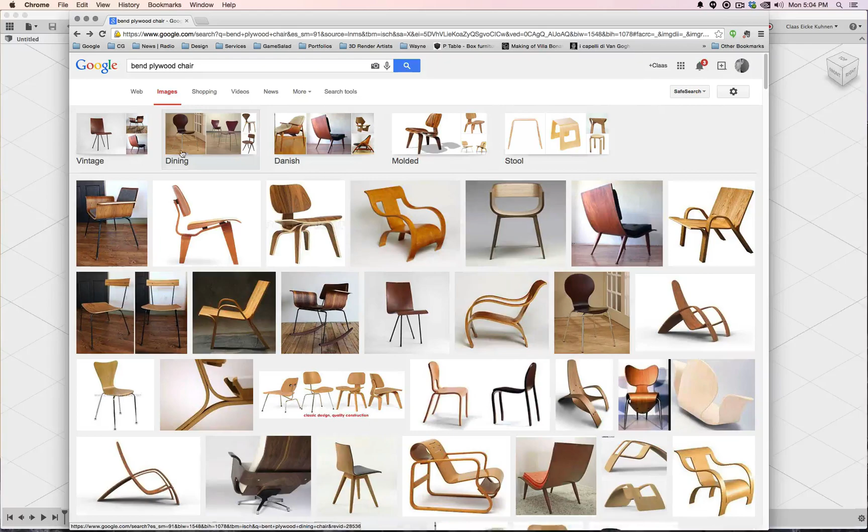And it really helps when you're not very familiar with shapes or designs to just use Google and browse around, get a sensibility for what styles are out there, what shapes are out there. You see they can range from very classic, kind of boring, to more modern or interesting, linear, more masculine, or more experimental and interesting looking, or also quite nice.

So the way I'm going to work with you, I don't want to say it's the only way we have to do it. In general, everything I do is just subject to change. There's no wrong, there's only more work and less work approach. So I will try to do something that's rather manageable.

So for example, if we would like to build something similar out of wood, we have to basically create a bent plywood master, and then we just cut parts out. So the same way we're also going to build it in CAD.

So I put down some basic measurements, and let's say this maybe is 18 inches by 18 inches wide. So I just keep those numbers the same.

So how do we start? Well, let's go to Fusion. I go to the sketch and let's change this to inches. I'm going to create a sketch, and I zoom out a little bit because I see where maybe 18 might be, and I click and drag a line up 18 inches, for example. Let's say there, click, press escape, and I'm simply using this line as a reference because right now I know where 18 inches height would be.

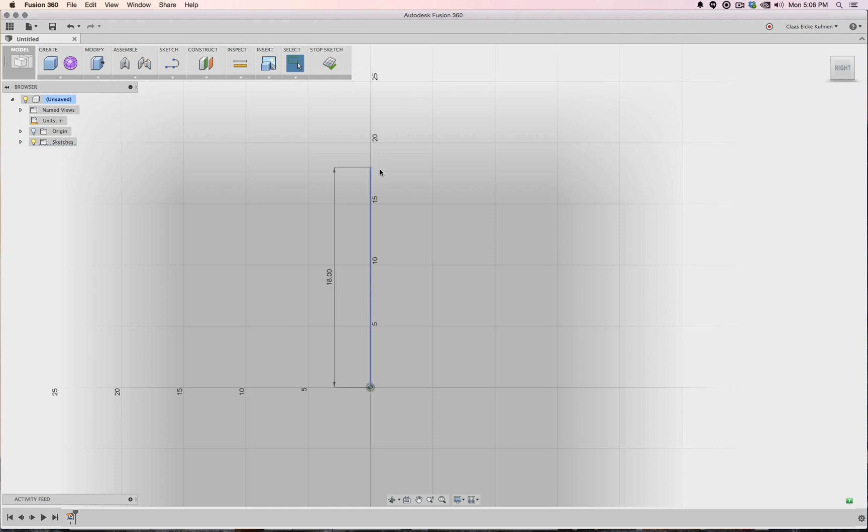So what we're going to do first is, with this line created, you see I can snap to the end. Let's say I type in 19 inches, hit enter, see it snaps horizontally, click, press escape. Good. Now this line I can delete, I don't need that anymore.

And then maybe from here, 19 inches, enter. So you see now I can only define the degree. Let's say that's the outside. Now we're drawing the inside, maybe something like this.

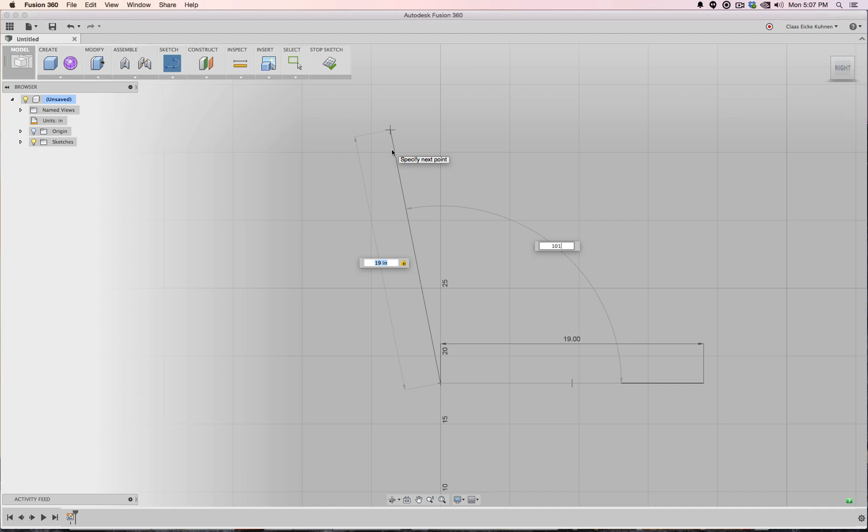So 101, okay. Also it's good to simply write down maybe those degrees at one point, so you just have a copy on paper, press escape. But you also see inside here the software actually gives us all the dimensions and the degree, so that's good.

Then this part down here, for example, should be rounded. Now because we're dealing with a bent plywood shell in this case, I will have to round the sketch.

But before I do that, I'm going to click stop. The main reason is I now have some sort of an old reference, and for example, I call this one reference, and I'm going to get back to edit.

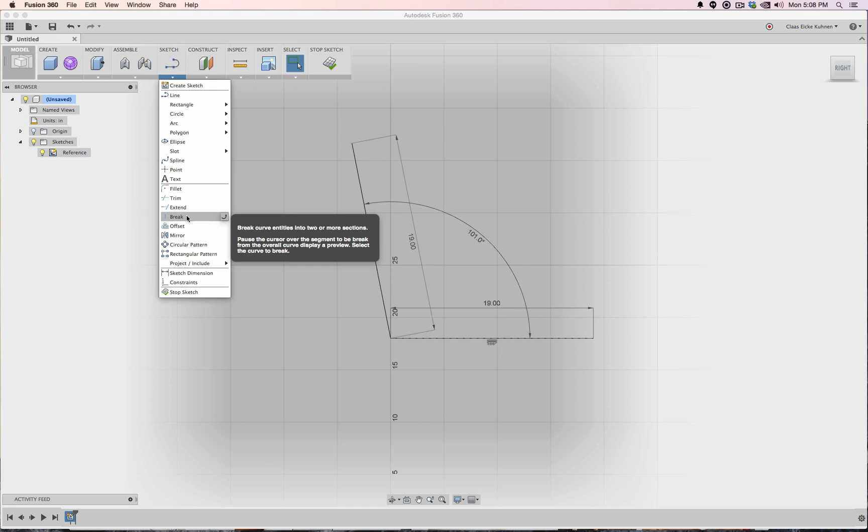And for example, I'm going to add an offset to this one, 1 inch. And you see there's a problem also, one line only gets offset. I'm going to show you what the problem is. So this doesn't work.

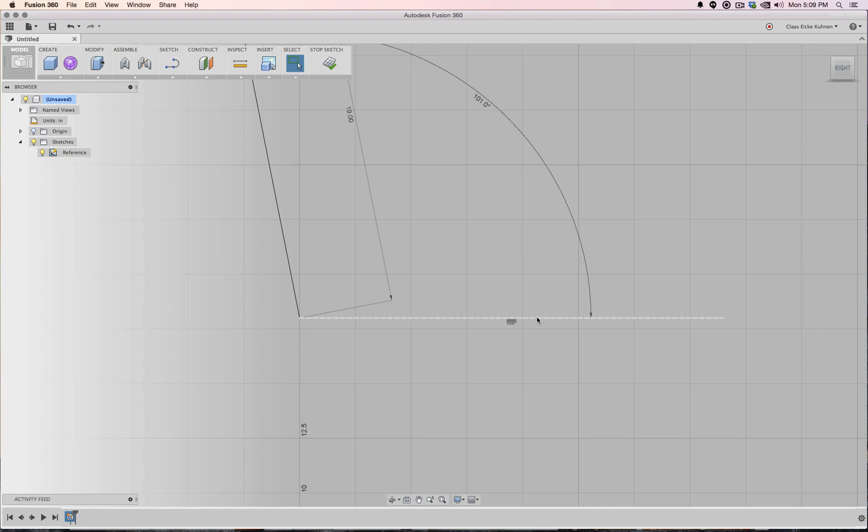If I zoom in, you can see this is dotted. Somehow magically another line here was created. You see there is a construction line, not really sure how that happened. So, delete it, click, and 19 inches, enter, click, escape.

Let's see, sketch dimension, can we actually do the rotation? Yeah, now we bring it back. So by these two lines, the software understood that where these lines are not parallel, so we cannot measure the distance, but they're touching here. They are at an angle to each other, so it understood what angle we want.

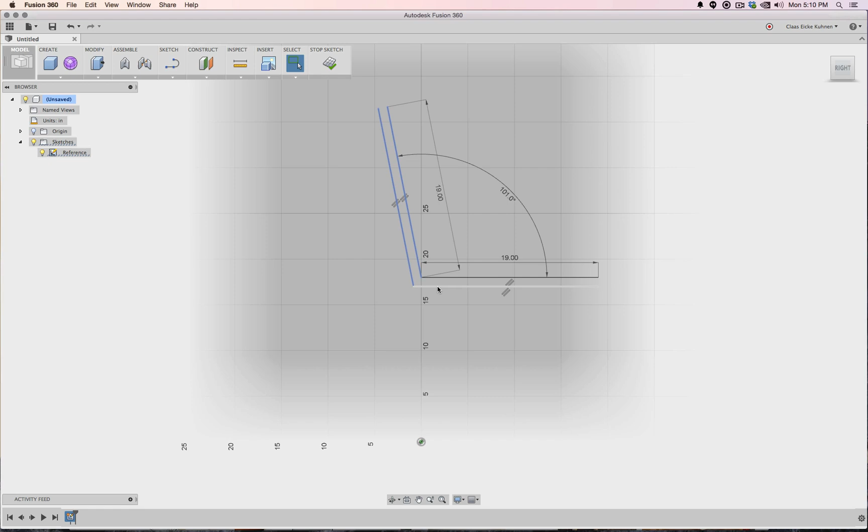So there it is. Offset, now you see both lines are highlighted. Click, 1 inch, okay. And then all these lines I click, left mouse button, right click, construction, okay. So you see now I basically have a template, so I'm getting ready to create myself another sketch there.

And for example, now I would like to bring this one over. So what I'm going to do is simply project those helper lines in.

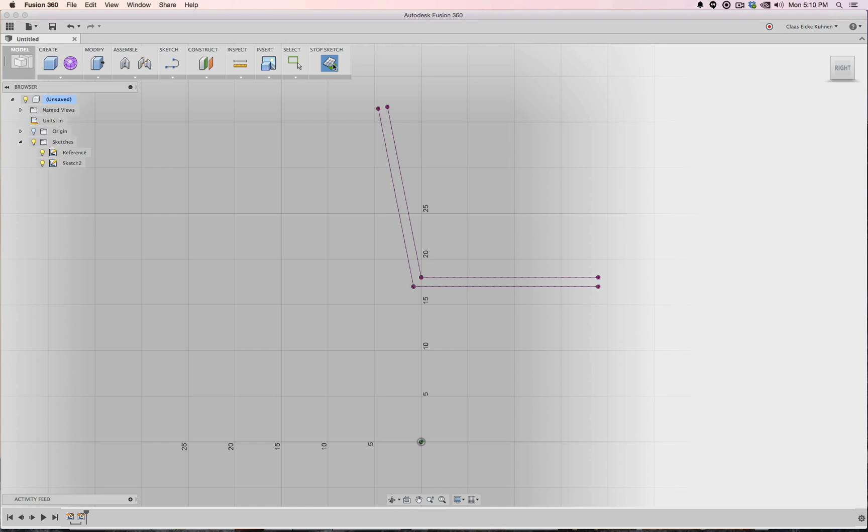Let's stop this, I don't need those. Okay, so with this project, I actually projected from the reference sketch the lines into the sketch. This is, for example, my mid cross section. Right click, edit.

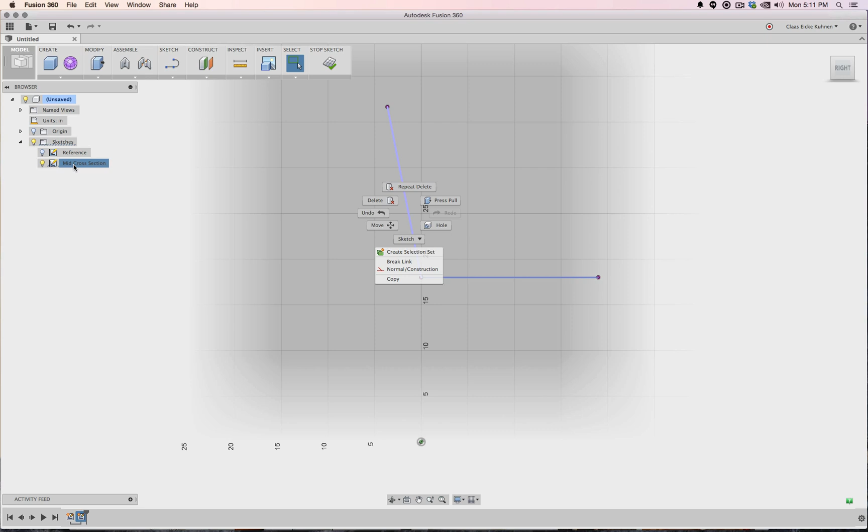And now I can do my fillet, but that doesn't really work. But what I can do now is select these two lines and say break link. A break link basically means currently they're associative, so they're projected from reference into here. When I break link, I break the projection link. Click it, and now those are actual normal lines I can continue working with.

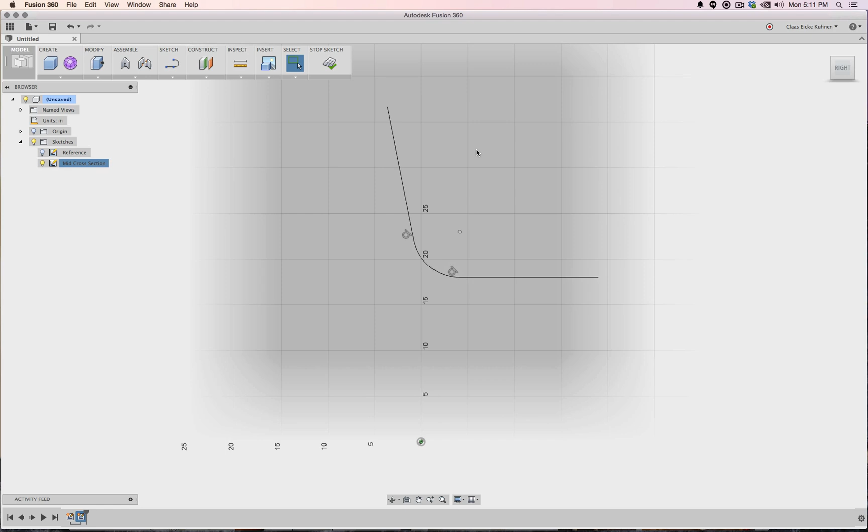And then here I do my fillet, and that's the inside. Let's keep this one at 5 for the moment. And then let's make an offset, all this 1 inch. See how everything perfectly overlays. And then let's cap those lines, so we have a filled surface. Perfect.

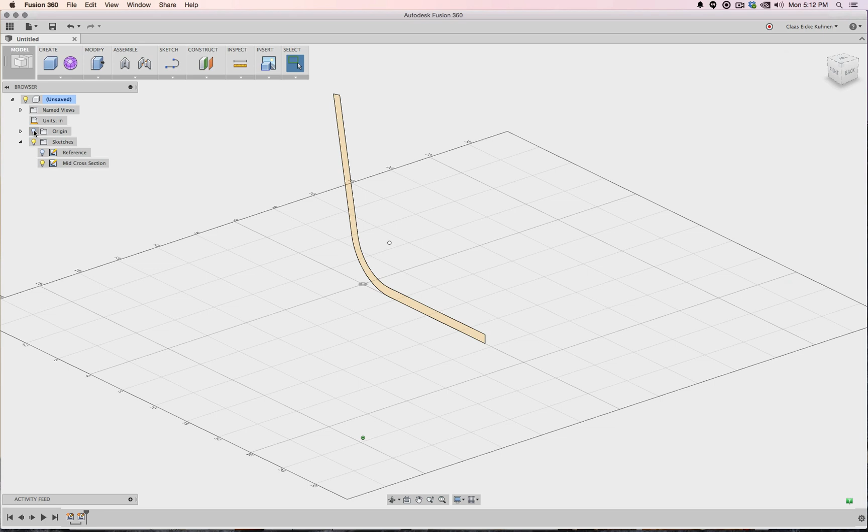So at this point, what do I like to do now? Let's show the origins. I'm going to create an offset plane from here, let's say 17 inches wide, so 8.5. And so that my design, my timeline, is simply more organized, I do the same here, minus 8.5.

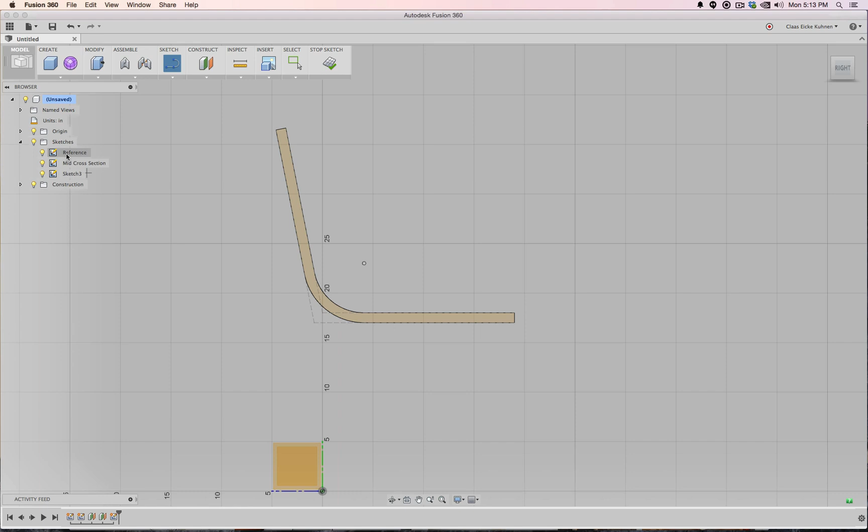Let's create another sketch here, go to there, and let's maybe show this one again. What are we going to do now? I would like this part to rotate a little bit more. So I'm going to do the same like before, project this one.

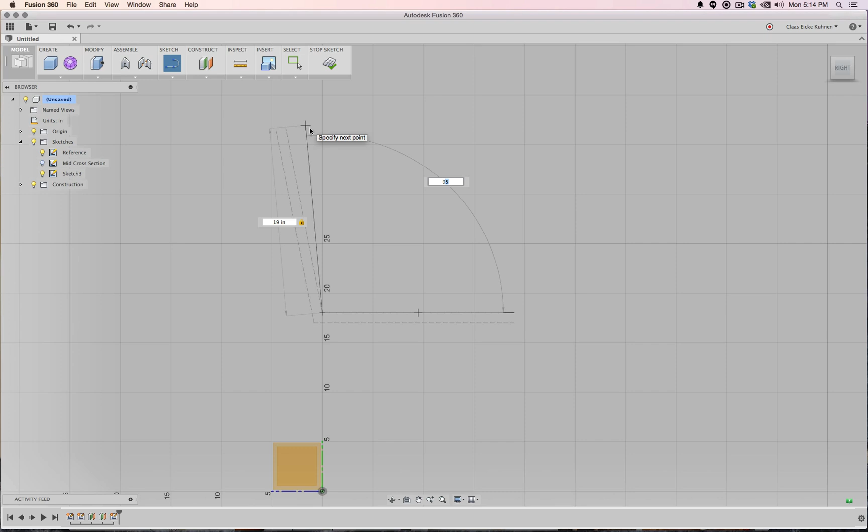Press escape, right mouse button, break link. Click, 19. And for the side it has to get to somewhere else, so a little bit less degrees. Maybe, oh, 93 is not really a lot. Maybe 92, whoops, 94, 95, 96. Let's keep it there. Okay, good, and click, escape.

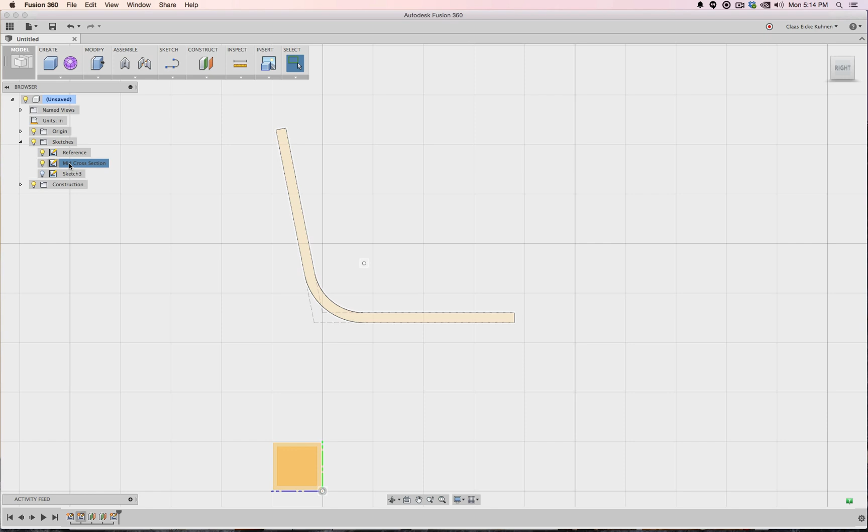And then stop sketch, because now I have a problem, I didn't really see all these dimensions here. So, show dimensions. Ooh, there are none? Okay, edit. Oh, I didn't give this fillet a dimension. So, dimension there, so 5. Now I see at least kind of like the amount.

I'm actually curious if I select these two lines, if I can do this, yeah, I can, perfect. See, they don't even have to touch each other. Okay, so let's go back to here. So this one, for example, I call outside cross section left.

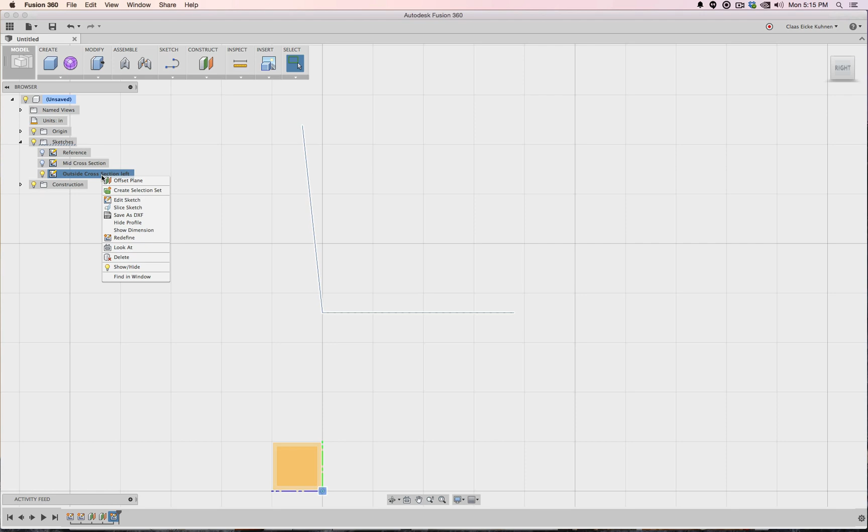So I see this one I rounded with a fillet of 5. Then edit sketch, fillet, and maybe 3. Okay. Stop sketch. Oops, that was not correct. Let's go back to edit sketch, and then offset an inch.

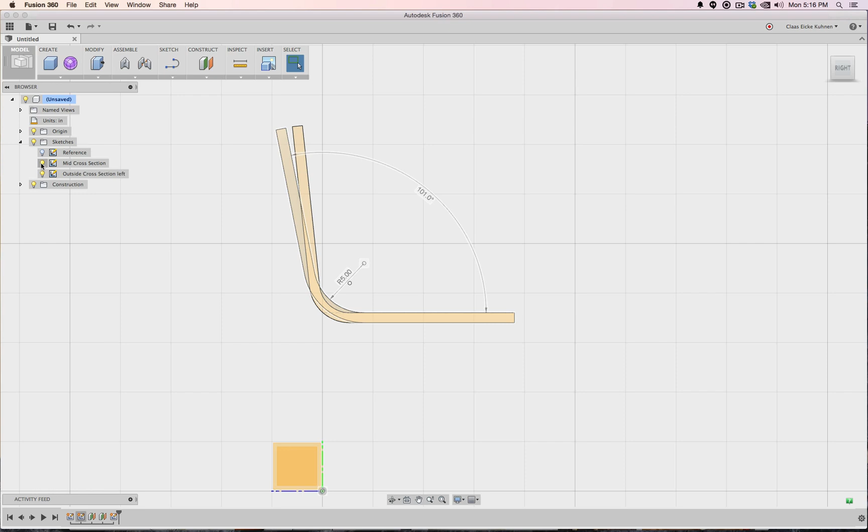Put in these lines. Stop sketch, and let's make an overlay. And there, for example, now you can see how the sketches start to look somewhat different. Quite interesting.

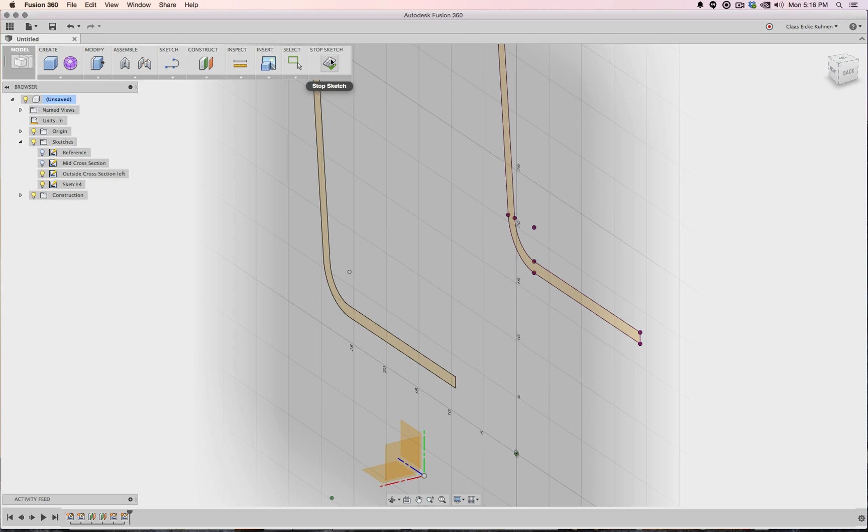Now, I made this third construction plane here, this one, see, this one is on the far right. I really don't want to draw that sketch again. So what I'm going to do is a new sketch onto this construction plane, and then project this one, this line, that arc, this one, and this one. Stop sketch.

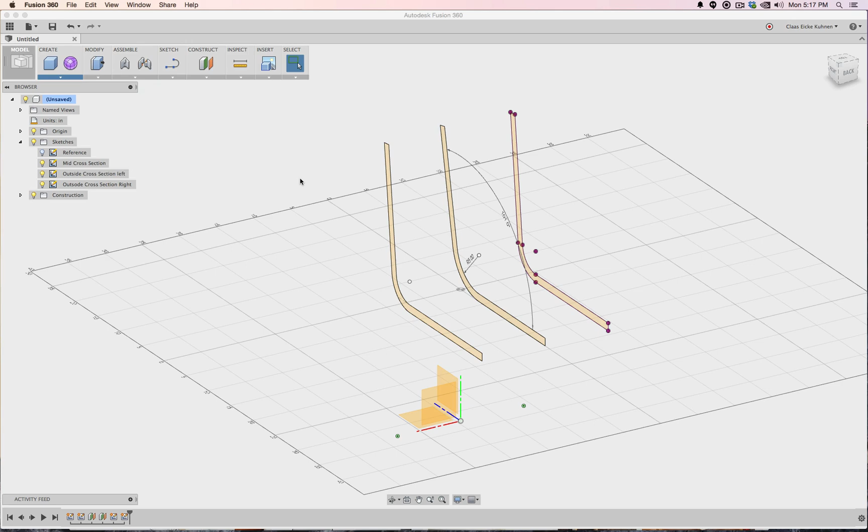And let's see what we have. So this one I call outside cross section right. And you see, I have 3 cross sections. Now I could go to create, loft, and then I click in here, and there. And it has to wait for a moment to calculate everything. And okay, there we are. Now we have a very basic wood shell.

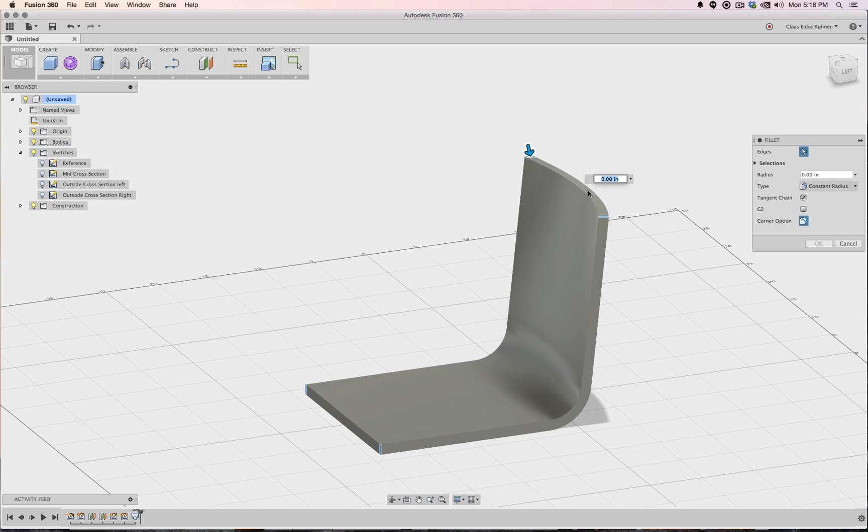See, that wasn't really too difficult. Now let's actually be a little bit more creative with this one. These edges are kind of sharp, so we're going to round them. I simply click on fillet and shift click those edges there. Nope, not that one, that one. And then I drag this one down. There, perfect. See, that's for example then how I say how something should be rounded.

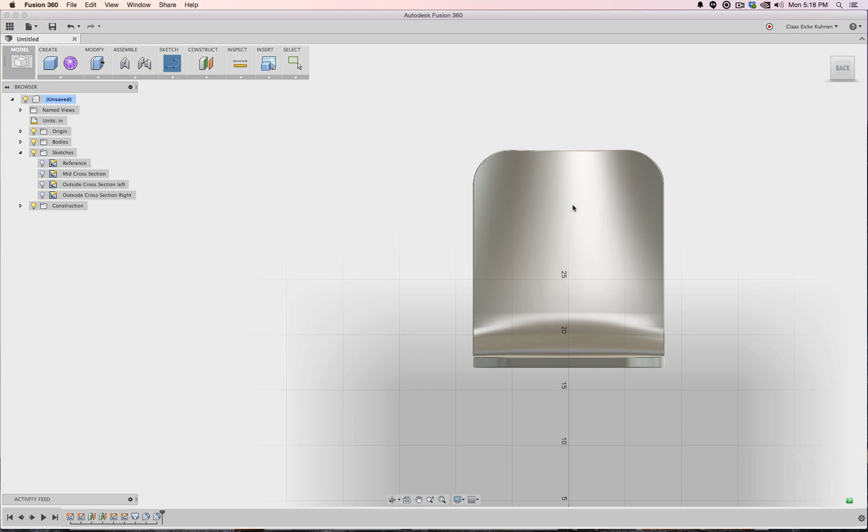Now all those corners are a little bit sharp, so I can go to fillet, drag over everything, and maybe type in 0.1. Okay, good. So just for the sake of demonstration, I would like to have some patterns in there. So click, make a sketch onto kind of like this view. You see I'm in orthographic back view. So if I click on this view, it creates a sketch, and circle, let's say here.

There and one there. Okay, great. Stop sketch. Now in AutoCAD we have to extrude and then do the subtract command.

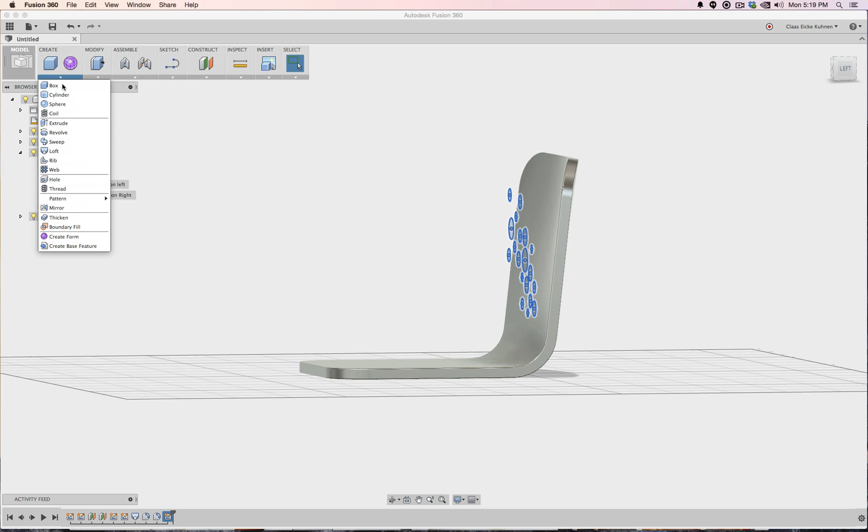In Fusion we can simply select these sketches, go to extrude, and just move it through. Click OK, and you see the moment you push it through the shell, this operation turns into a cut. And OK.

Now you see that those edges are rounded, those edges are not rounded. So take a look at this. I select these two and just pull them to there, to the end.

So why did I do that? We made the sketches, we made the construction planes, we drew sketches, we made the solid, I made a sketch for these rings, extrude and cut, then I rounded those big corners, and now with the end result of this edge and all these sharp edges here, I'm going to round them all again.

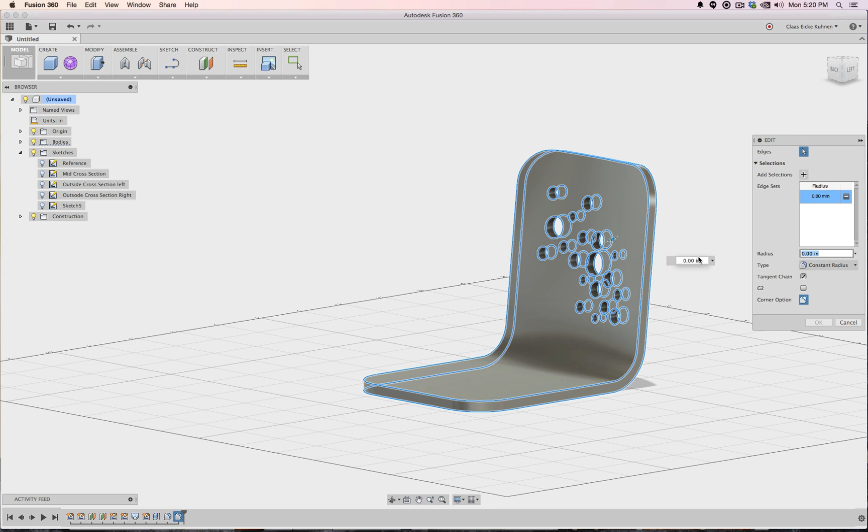So I go to this one, delete it, and drag over and type in 0.1. Has to work for a second. Okay. And there we are. So now there we have a basic wood shell.

Now there's just a tiny itsy bitty problem in our design. You will see that this bigger fillet dips upwards, and then the smaller fillet, you see what I'm pointing out. See, for example, there you can see how this is concave. So that's going to be a little bit uncomfortable to sit on.

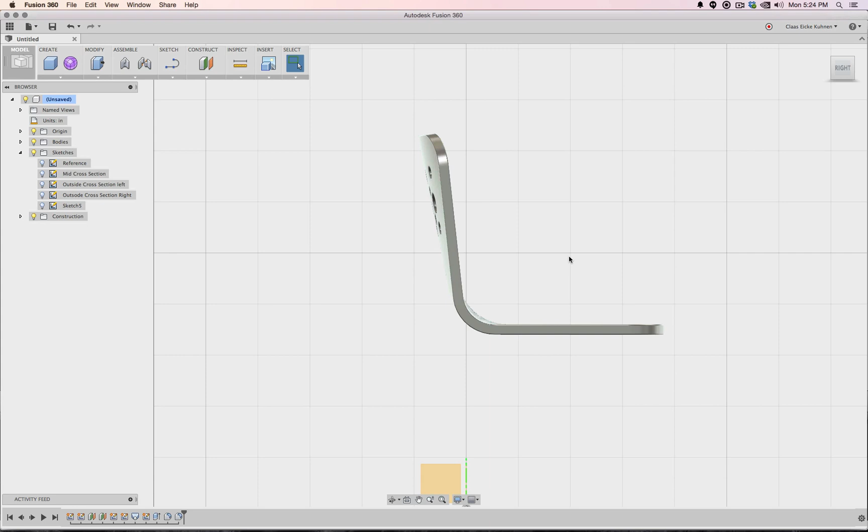Now, this approach I showed you will work best when, for example, those fillets inside your sketch remain the same. If not, this might not be the best idea. But let's see what we can do to change this one.

So there's our center sketch. Go to edit, and what I'm going to show you now is one of my most favorite parts about Fusion, because it is so flexible.

So this one I delete, this one I delete, and let me see if I can... ooh, I cannot. Not a big deal. I'm going to delete those for the moment.

Because let's move this one out. Let's move this one. Nope. Let's see if I can extend that line. I can. There. Move this one back. Stop. Zip. Okay.

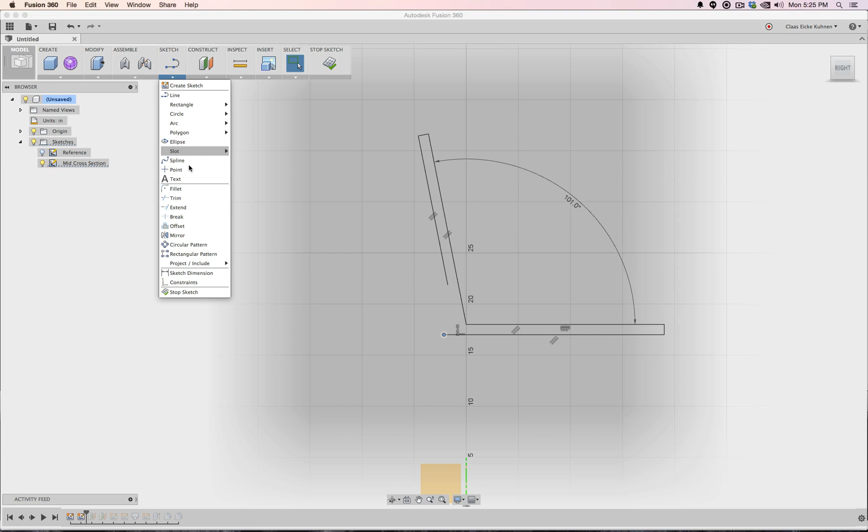Then I'm going to do this again and extend this one. Oh, I thought I did extend it. There. Okay. And move this one back. Good. So this one should now be horizontal.

And let me show you my original construction sketch. Now what I'm doing is trying to see if I can maybe move those a little bit. You see, if I move this point down, everything gets thicker. Terrible. Well, that's because I have those constraints here.

They say make everything parallel. So there, see, now I can do something like this. And oops, that's not good.

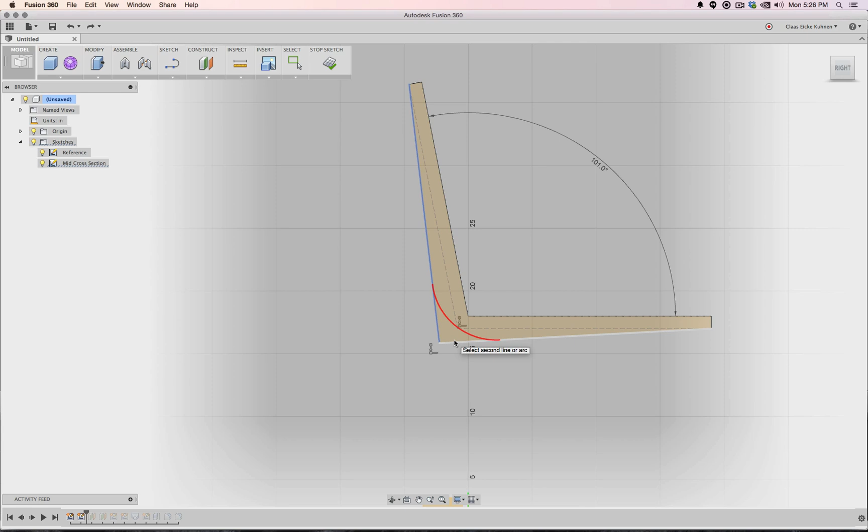Hold on, let's go to fillet and see when we fillet this one with 5 where we are. Okay, so maybe this one I push a little bit to there, and fillet with 5. Okay, so what I was looking for is to see where I get to with a 5.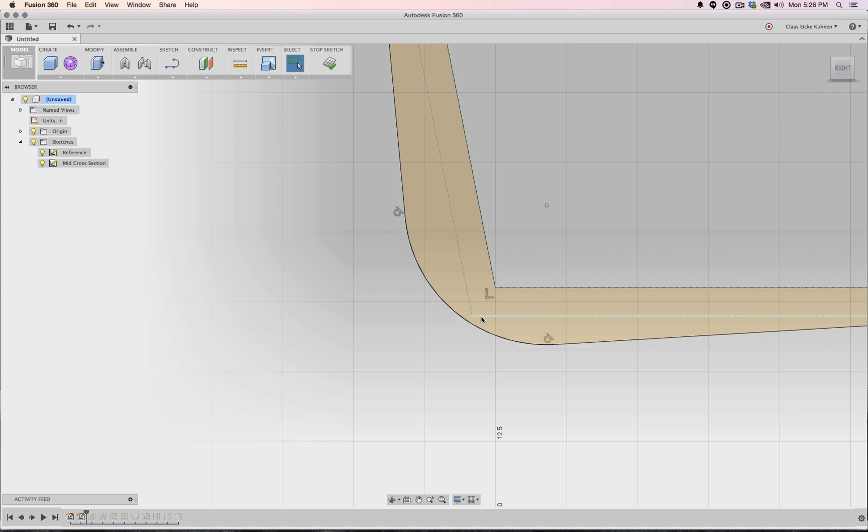Now you see this line is terrible, so I simply delete it. And what I'm going to do is simply offset this line by 1.

Offset. Nope. Hold on. One more time. Offset. Do not do it this way. By 1, right mouse button, drag up. 1. And one more time. 1. And if everything worked out right, it should connect perfectly.

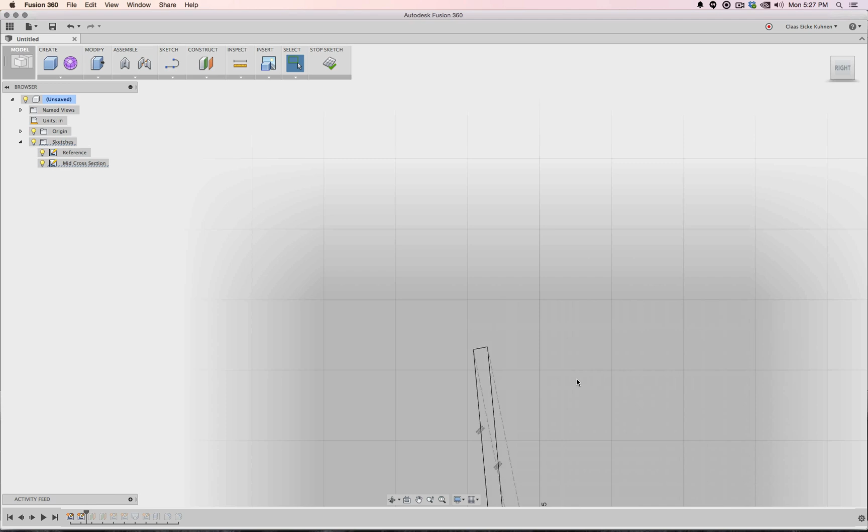It did not 100%, so this one, zip, I connect to there. Let's take a look there. Nope. Zip. Okay. Perfect. Let's click OK.

And Fusion might take a moment. Ooh, some things are not working out. So it skipped that thing. So let's go back to here, right mouse button.

Oh yeah, if something is yellow, that means, sorry, there's a small problem. If it's red, there is a really big problem. But this can easily be fixed.

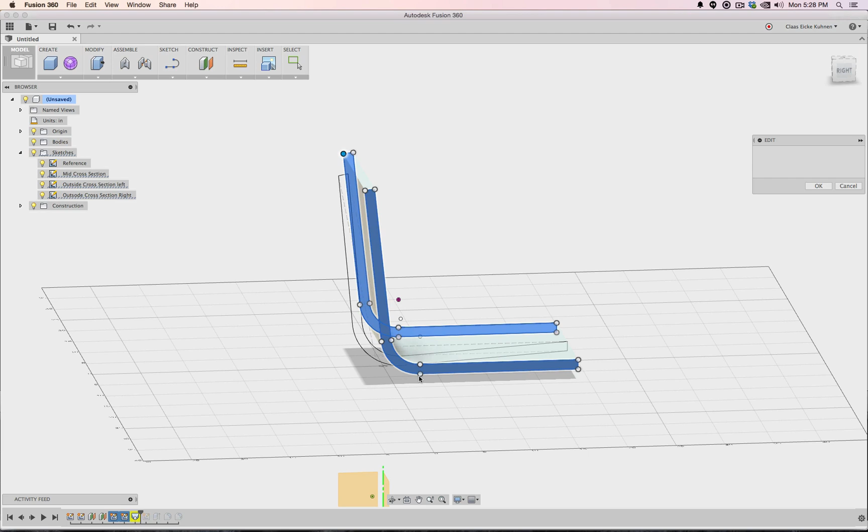Probably it also only has 2. Yep, it only has 2 cross sections. So all I need to do is say... oh, hold on, that one is actually not yellowish. That's the problem. There, add it.

Oh, that's interesting. Let's see what the problem is. So delete that one. Okay, that wasn't it. Delete that one. That wasn't it either. Delete, delete, and...

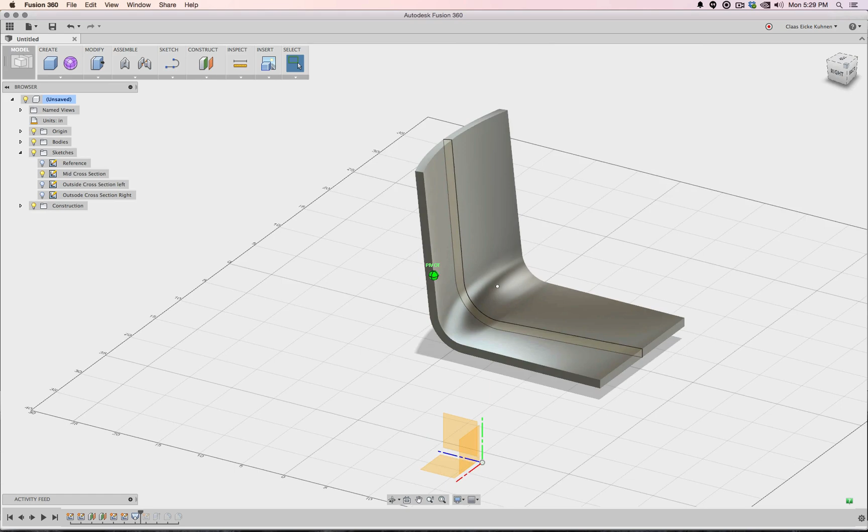There, now it's yellow. So when I offset all those, this line, this arc, and this line, the ends didn't really touch. Okay. Oh, look, the loft command also worked again. Let's take a look from the side, and you see, that one looks already much, much better.

Let's go back. Ooh. Uh-oh. Okay. Let it work. Okay, now it stopped complaining.

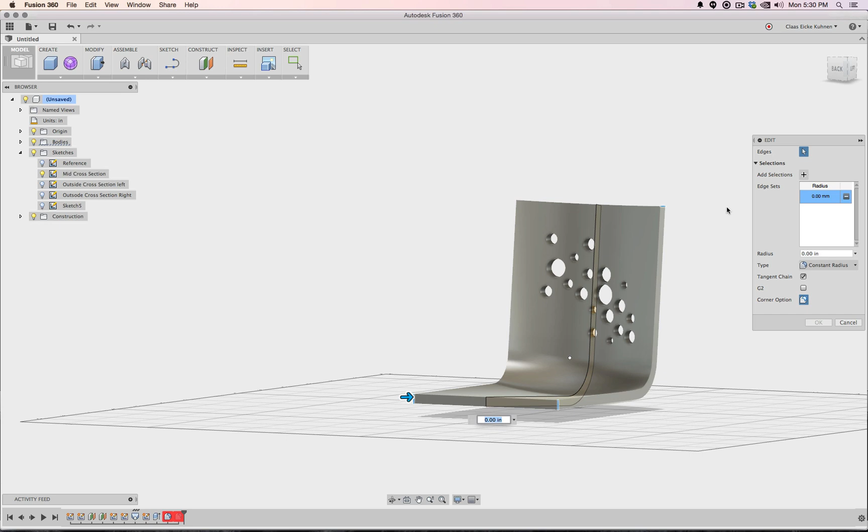Not a big deal. I did a lot of changes to the geometry, so all these edges are kind of confused. It doesn't really know what edges to select. So all I need to do is simply reapply those edges.

0.5. Oh, was it 3? Oh, okay. And then the next fillet is flipping out. Not a big deal. So simply drag over everything. Oops, way too much.

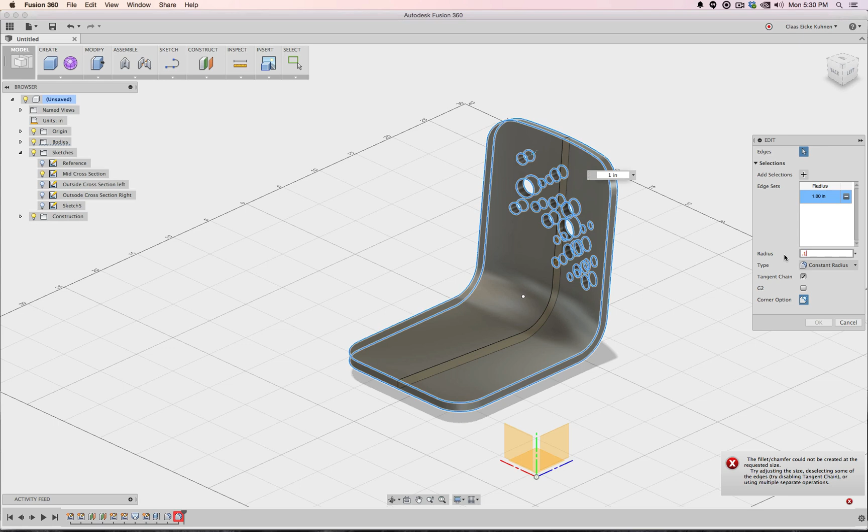Now Fusion has a lot of math to do. Okay, it didn't do it because it can't. 0.1, okay. And there we are—see, everything is green. Perfect. You see also from the side, that looks actually nicer. If you look from the top, you see it kind of arcs back. If maybe from front, look down, you can see that it's linear and then it dips down.

So that was actually not too difficult. Okay, so that was basically one way how to do it. Now to have a little bit more control and maybe a little bit less work, I'm going to show you an alternative approach.

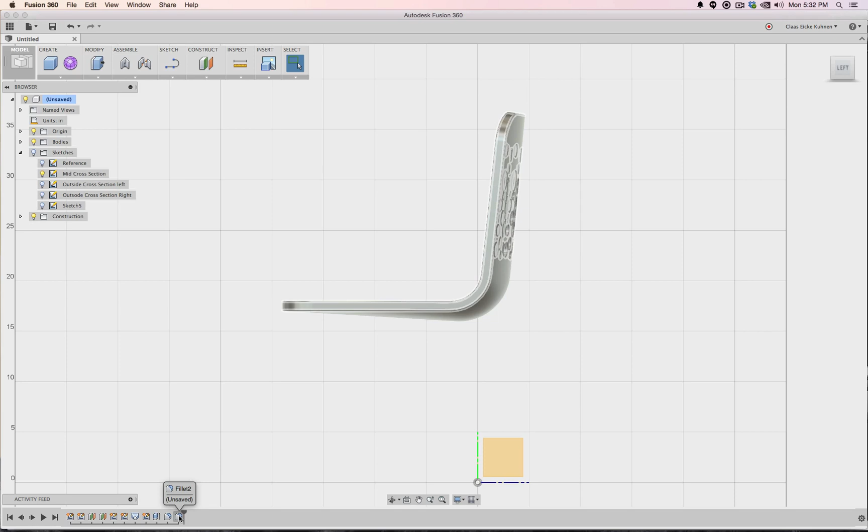I'm going to select all this and simply group it. So you see it's gone from here. My reference line I would like to see. Oh no, you know what I did? What I do—zip, I simply delete everything. Let's do it this way so we're not getting any confusing pieces in our drawing.

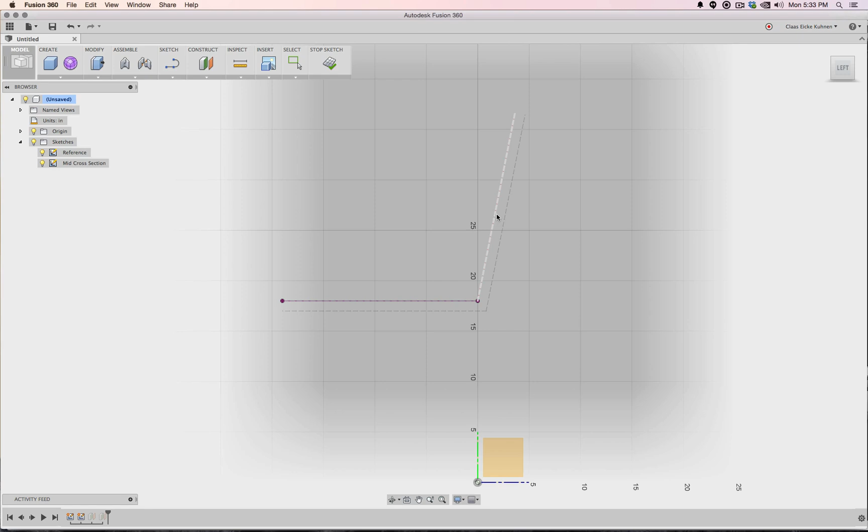I'm going to start with the mid sketch at the center of my object and delete these lines. Okay, zip, zip, zip, and zip. Good. And then to have a little bit of clarity, I bring in these two lines.

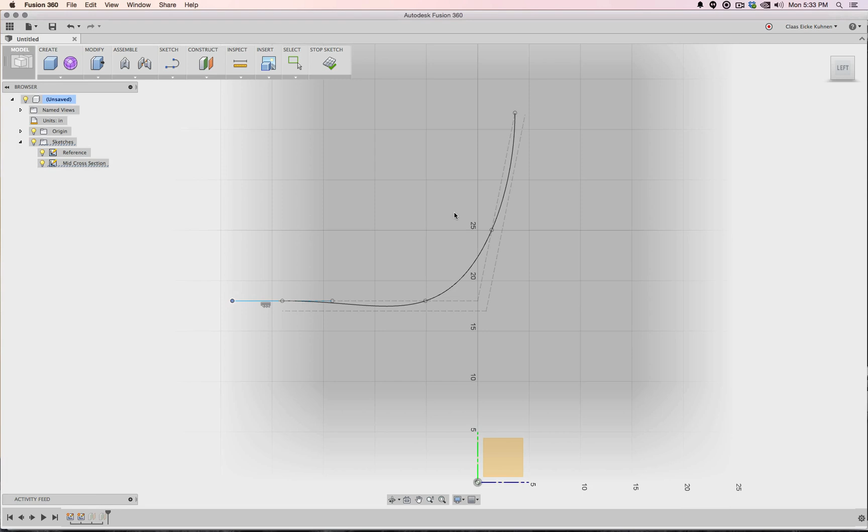And what I'm going to do now is simply work with the spline command. So, for example, click, click, click, and click, press OK. These magenta lines now I delete because I have my perfect endpoints. And then, for example, these splines—if I click on these handles, you can see I can work with them.

This, for example, should be for the mid part. So maybe I move this one down a little bit to there. And I think you start already realizing that you have a lot of sculpting ability for really nice soft transitions. There, maybe it's like this. So maybe go to there for that one.

Maybe we have to pull this one out a little bit more. Maybe a little bit up. There—this is kind of strong, so maybe let's do it a little bit more like this. Well, okay, keep it there. Good, just one spline, nothing more.

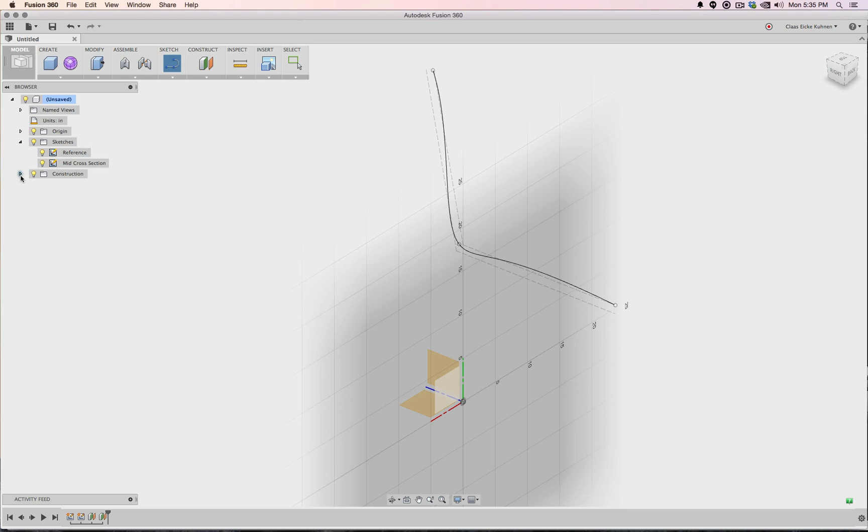Now I'm going to create myself a sketch, and I would like this sketch to be—I don't know, let's start on this plane. Okay. So you see, I have 3 points.

So to have a little bit of help, I'm going to bring in those lines again. Go back to spline, click, click, and click. Okay, and then I can delete these points. I do not move these points because they should be all lined up, and later I'm going to move them to show you what will happen.

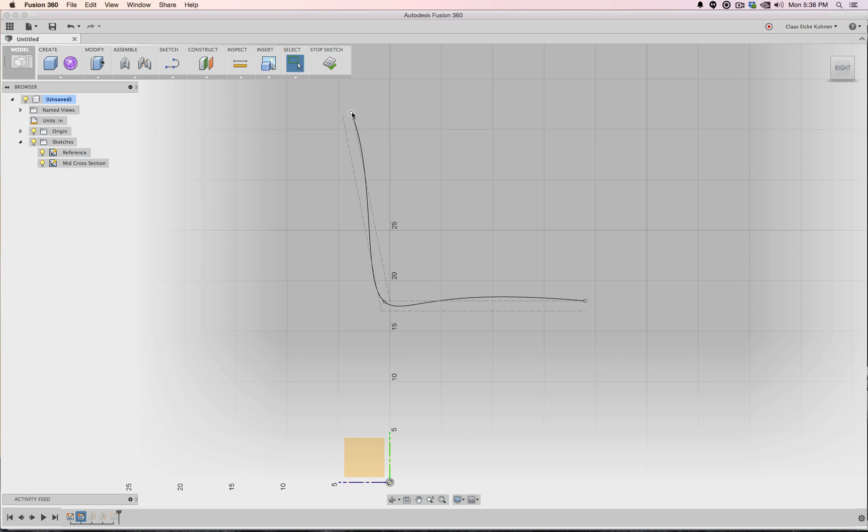And then you see now what we can do. Maybe here I push this one up a little bit higher. Here maybe a little bit to there. Maybe there, I don't know. Okay, I would like to go back to the midsection, and this point simply move back to there. Okay.

Let's take a look at what we have. You see, kind of like splines. Okay, let's turn off the reference. We need one more sketch actually on the other construction plane—so this one. And then here I simply include this sketch, zip.

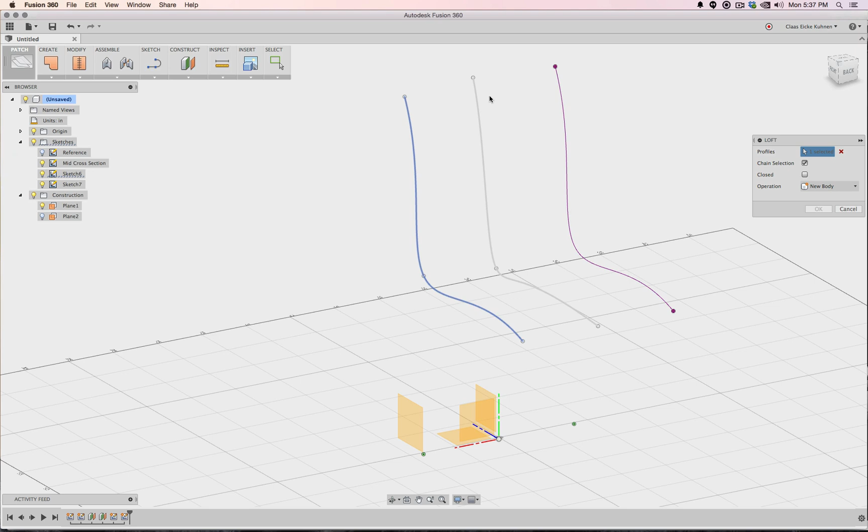Okay, good. Now what I can do—loft in solid or model only works when you have a closed shape, and it creates a solid volume. However, if we go to patch and then go to loft, we can do this. Take a look at that. So this is a flat sheet.

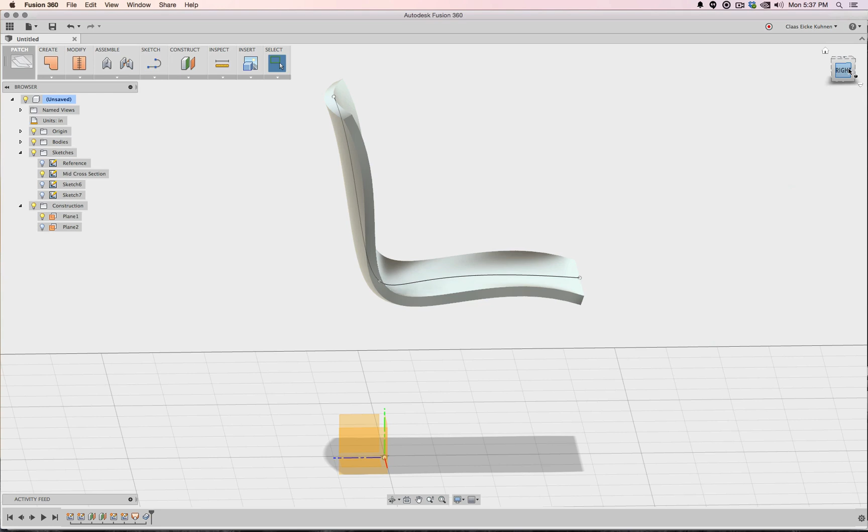And this sheet, then we can actually thicken 1 inch. Zip. So you see, actually, for something very organic, this is probably the most preferred way.

Now I can actually be nice and explorative. Move this one to there, or maybe move it back, or maybe here. This one I move forward. Oh, actually I moved it down—that's not what I meant. I meant it more like there. But you know what, let's move this one down just a little bit. So there you see what can happen. So this is pretty nice.

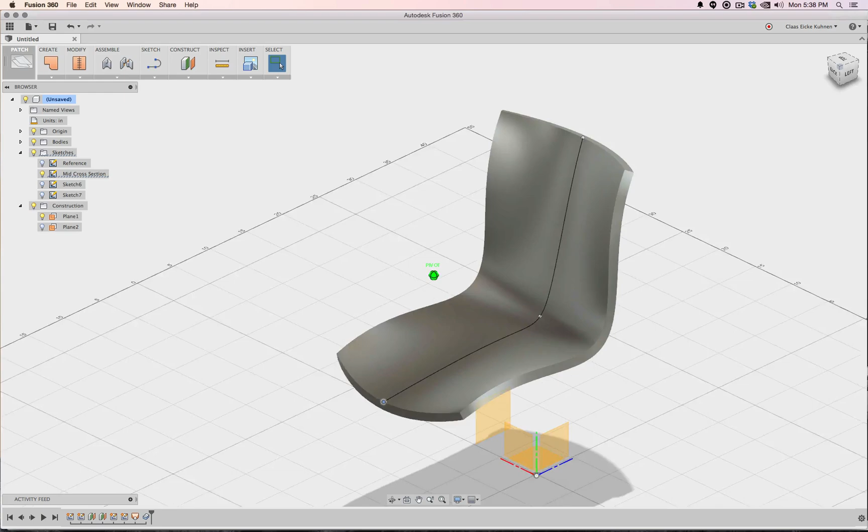Now, if I click on the sketch and go edit here, maybe I would like to fine tune that spline a little bit more, maybe make this a little bit wider. Click OK. Pay attention to how this flows. Maybe this point a little bit back there. Okay, huh? That wasn't too difficult.

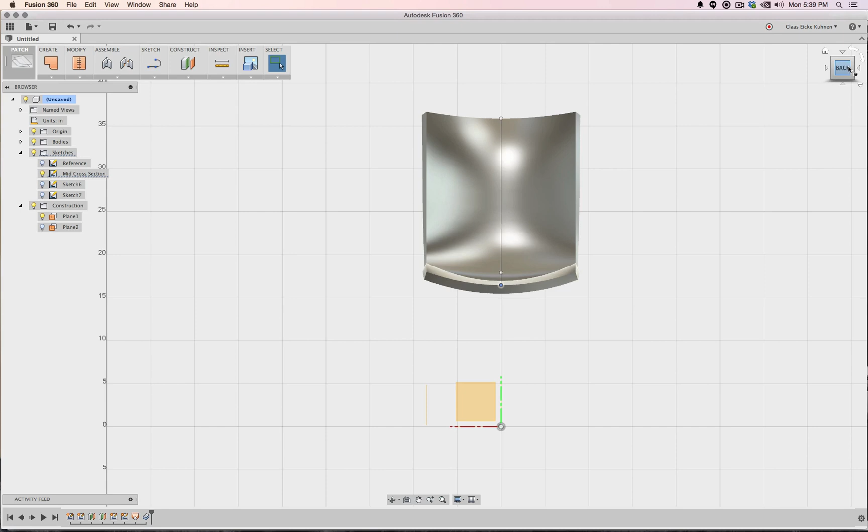So what else can we do? Well, we can round all these edges, etc. That would be the same process as before. But what we are going to do is actually cutting a shape like this one out.

So there are multiple ways how you can do that. For visualization purposes, we simply go to kind of like a 45-degree view at it from here, make a sketch, and then cut through it. So that means we need something here.

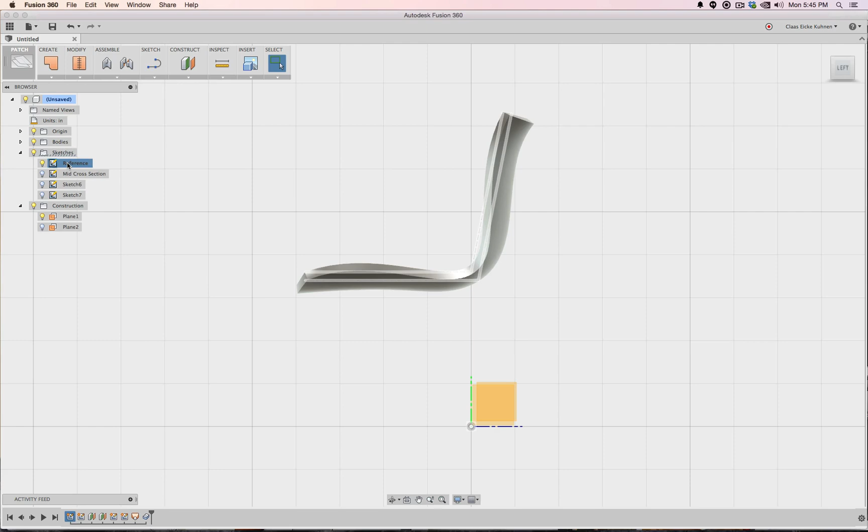Let's take a look at what I'm doing. So here I have my reference sketch. This sketch I'm going to edit, and for example, at 45-degree, I make another line. Okay.

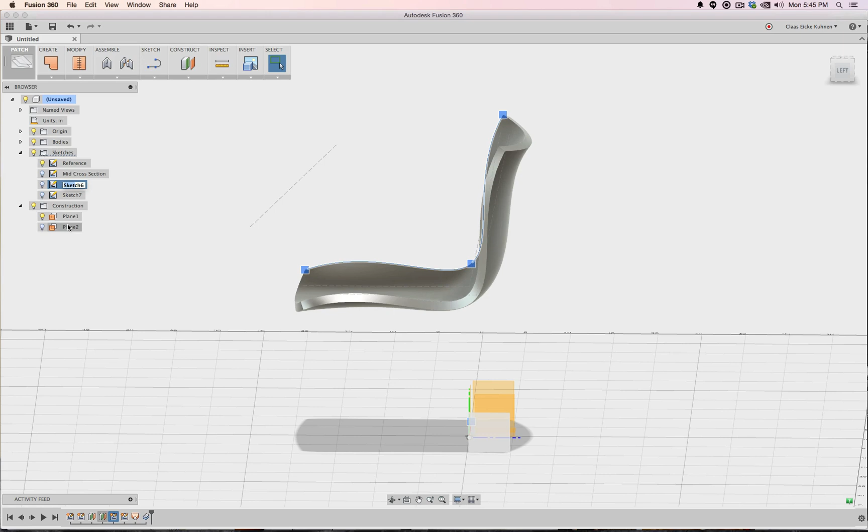And let's call this one — this is, for example, outside, and yeah, outside as well. That's two. Okay, and now I would like to create a plane, a construction plane along this line.

To do this in Fusion, you can select Construct Plane at Angle, click this line, go to a side, and you see this plane is at the right angle. You can also rotate it, which is not what I want. Leave it at this. Everything I show you here right now is going to be one-to-one transferable to Revit.

Fusion is a little bit less competent than Revit. Revit is a little bit less competent than Fusion, because Revit is more for architecture, and it has a dumbed-down furniture system. But if you have to build something in Revit, it's one-to-one the same.

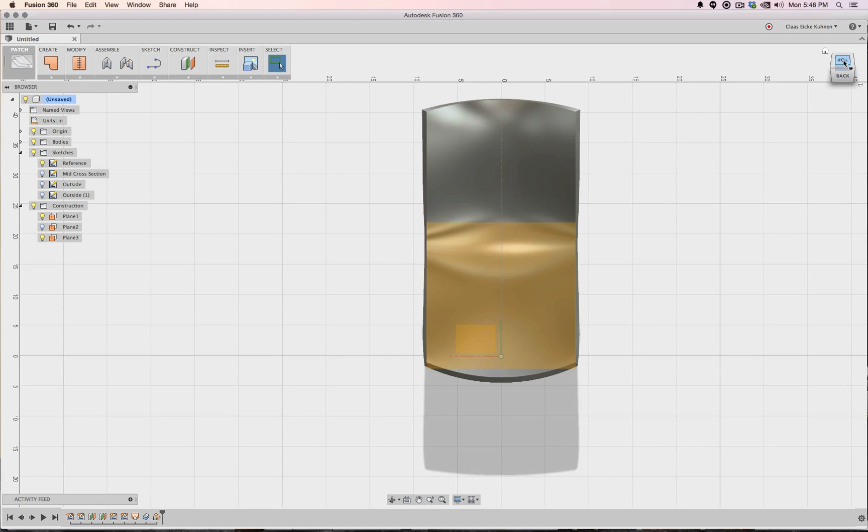Okay, so onto this plane I'm going to create myself a sketch. You see now the sketch plane is at 45-degree. So what I'm going to do now is, for example, this. I'm going to create myself a big line. Escape. In this line, I do construction.

Then I go on spline. See, now I can snap to this line. Click, click, click, click, and click. Okay.

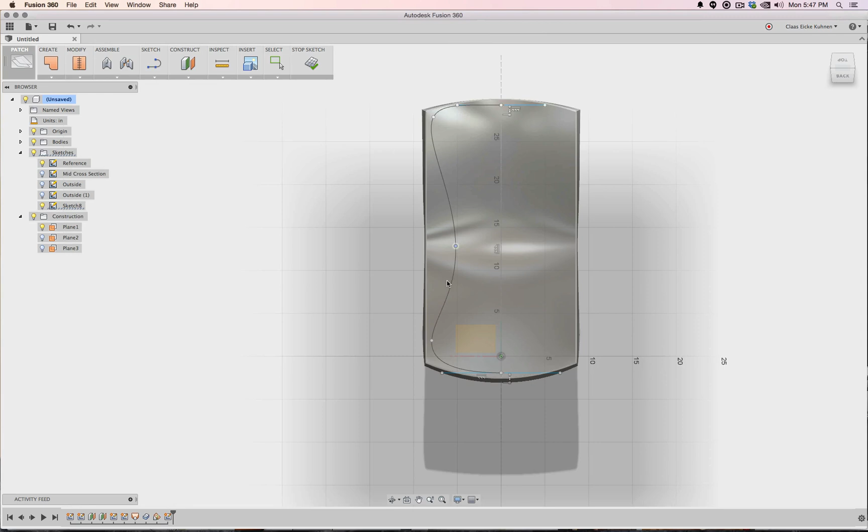So I have to do some cleanup. These lines — see, I'm rotating them till I get a horizontal constraint. See there. Click here, there, the same. Can pull those out. This, for example, should be at the corner, so maybe there. This one can go down a little bit.

Okay, then let's mirror this one over. Mirror this one, the mirror line, that one. And you see it now — it's a solid shape. And you see that.

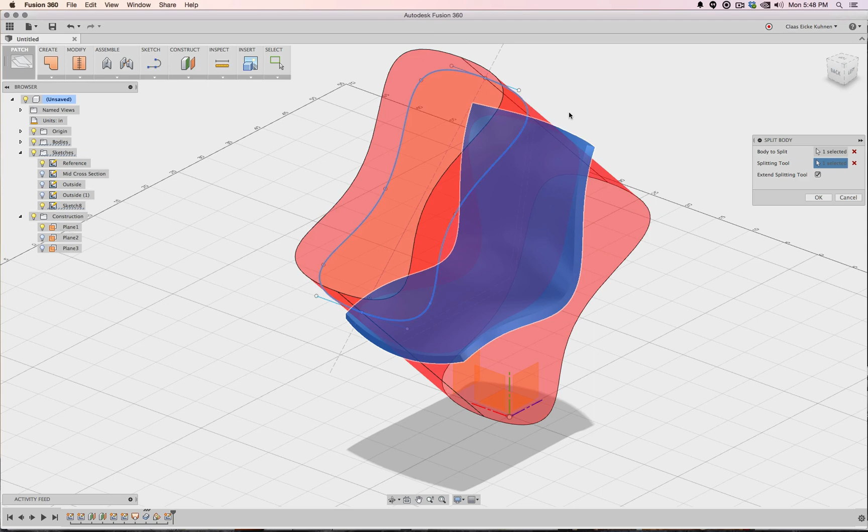Okay, so what can we do now with this thing? Simply the following: let's say split body. This one splits with this body, and there and there. You see that I clicked on these two sides. I have also this extend. Okay, click OK.

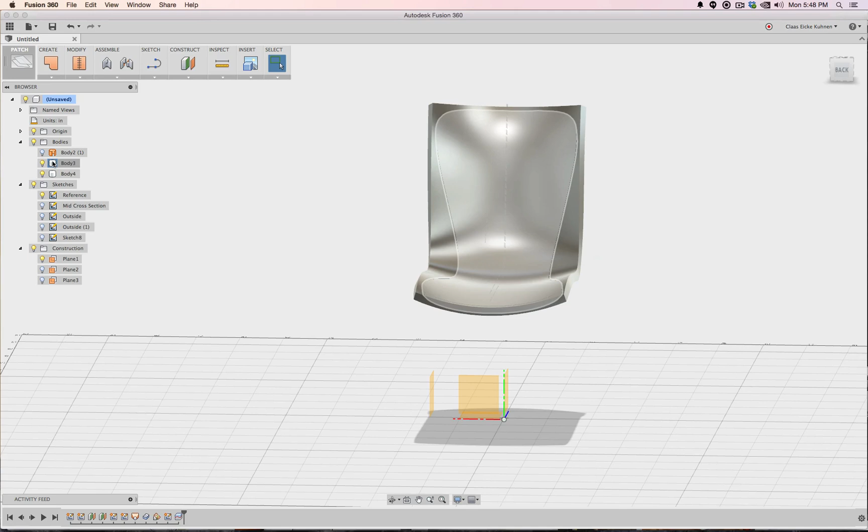And did anything happen? Don't really see much. Let's take a look into our bodies, what we have here. Look at that. Let's hide this one. Ta-da! There it is, you see?

Now these edges are of course not perfect. To get all these cut edges done in a way how maybe that should be with a saw, that's a little bit more modeling work, which since we're at the beginning level here, we simply skip. But you see that I need to interpret a little bit the positioning of these lines along the 45-degree, so when I project them down this way to see what type of my wood shell I'm hitting.

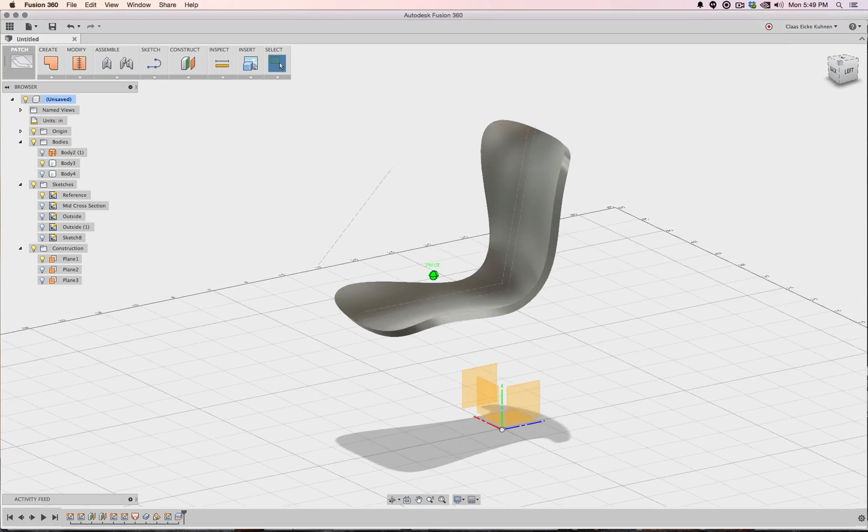Yeah, okay. Because — let me show you another reason why I really like this timeline — I'm ending up with another part here. This one, I don't really like that one. So I think I can simply delete this part. This shell thickening currently I delete as well.

So let's see, here's our body. Here's our sketch. Let's go to this view. And we also have a trim here, so I can click trim. The trim tool is, for example, this one, and then let's see if I can trim this one away.

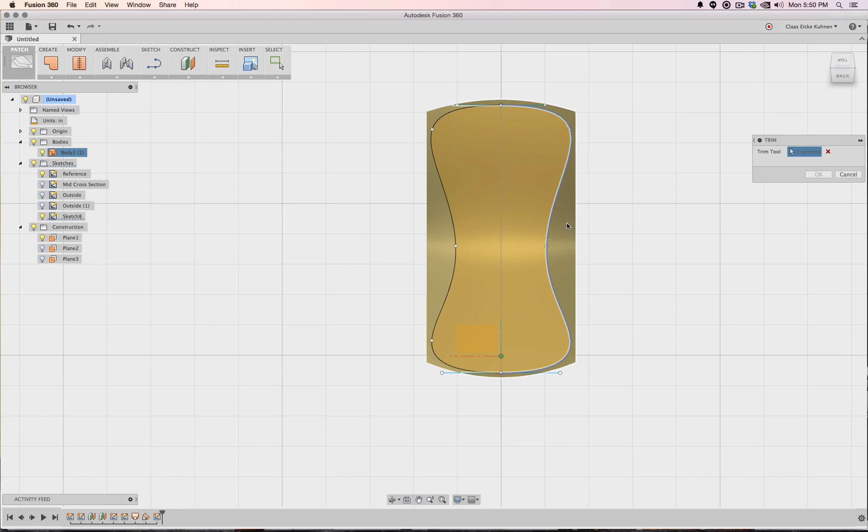Okay, one more time, trim this, and then click on this shell, click OK. And you see I trimmed that surface nicely. And then I simply go to thicken this one, 1 inch down, and there I am.

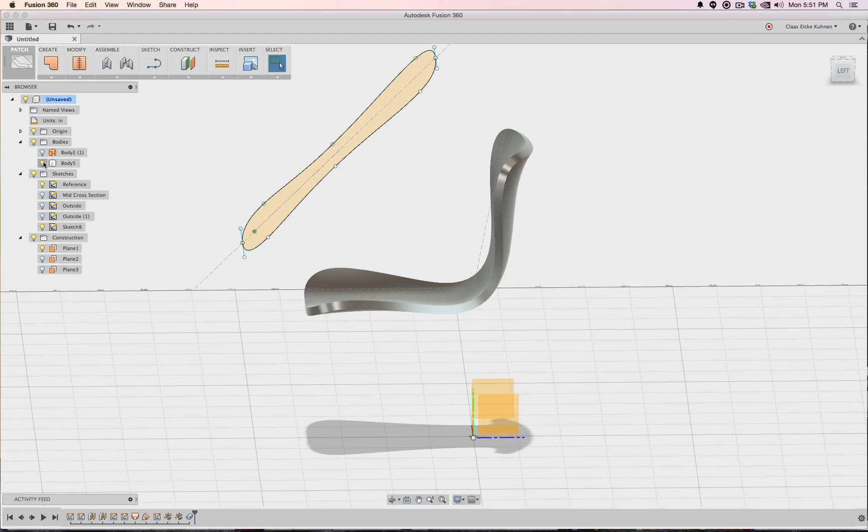So you see down here I have now 2 commands instead of a split — I have 2 trims. However, up here I still just remain with 1 object. That's a nice advantage of it.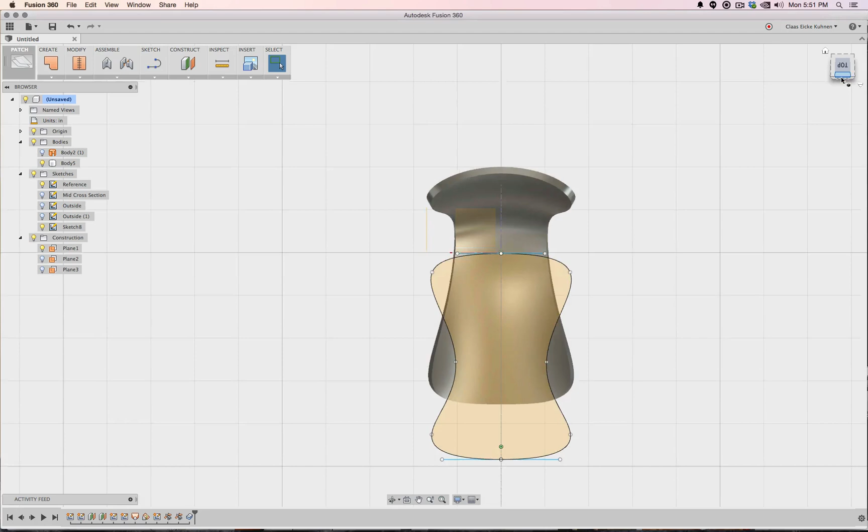So I don't really like the way how this looks. For example, that is too long. So maybe let's see what we can do. I mentioned before you have to interpret this a little bit. So maybe...

Go into edit, click on this one, and maybe push this one up there, a little bit this way, a little bit down. Click stop sketch, and let's see what happens. Yeah.

And basically you can continue sculpting your shapes. Maybe the center splines I don't really like. Here's my outside one there. So maybe this one shouldn't be so low, maybe there. And this one maybe to there. Let's take a look.

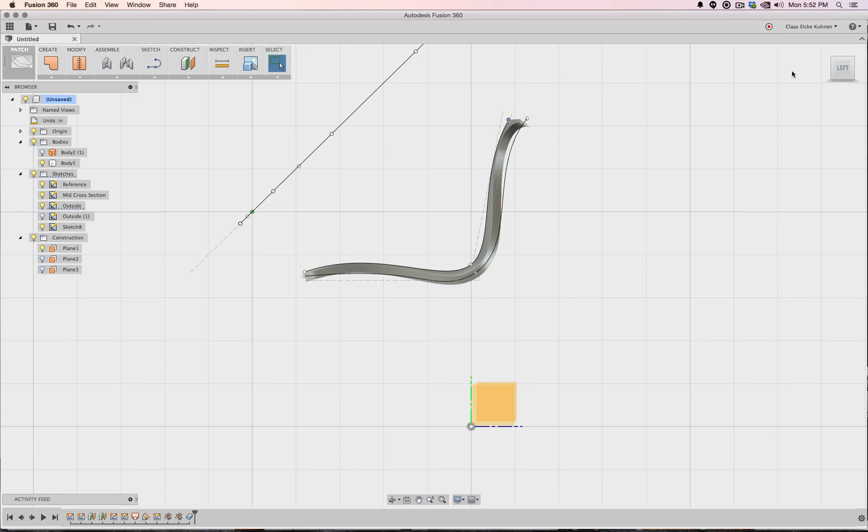Oh, whoops. Oh, what happened here? Oh, that's interesting. Let's go back to here. Show me this one. Okay, that works.

Ah, I see why. You see, this one is too low, so maybe let's go to there. No, 1 or 2. Ah, I flipped the direction, that was all. So here, add it.

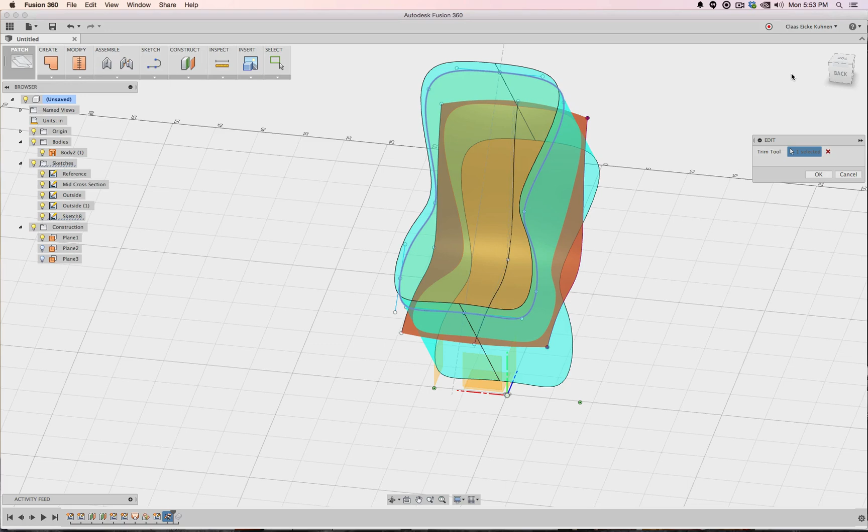Okay. That's the cutting tool. Oh, hold on. Why do I actually have 2? I should only have 1. Add it. Oh, there it is. And click.

And it takes a moment for Fusion to calculate. Or not. Okay.

Say you cut this one out. Okay. Oh. No, that shouldn't happen. That's not good.

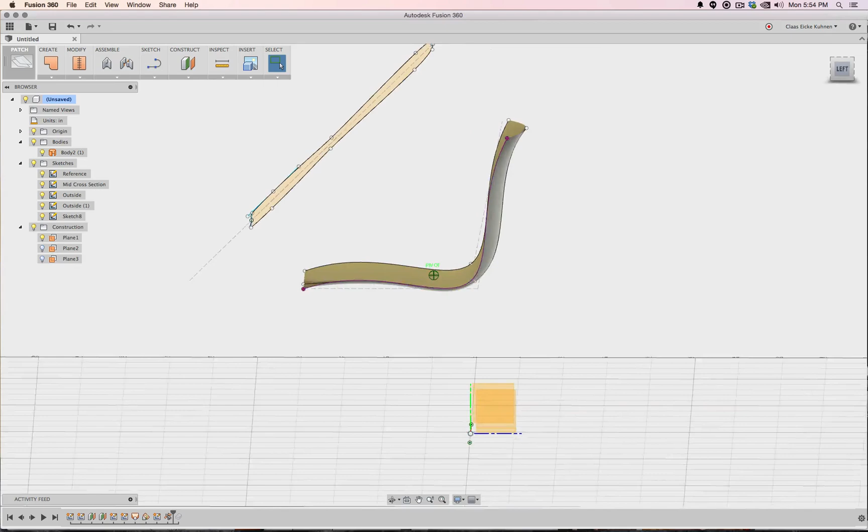So trim tool, you cut this one out. Okay. Huh. Yeah, I don't understand why. I have to maybe send this one to Autodesk.

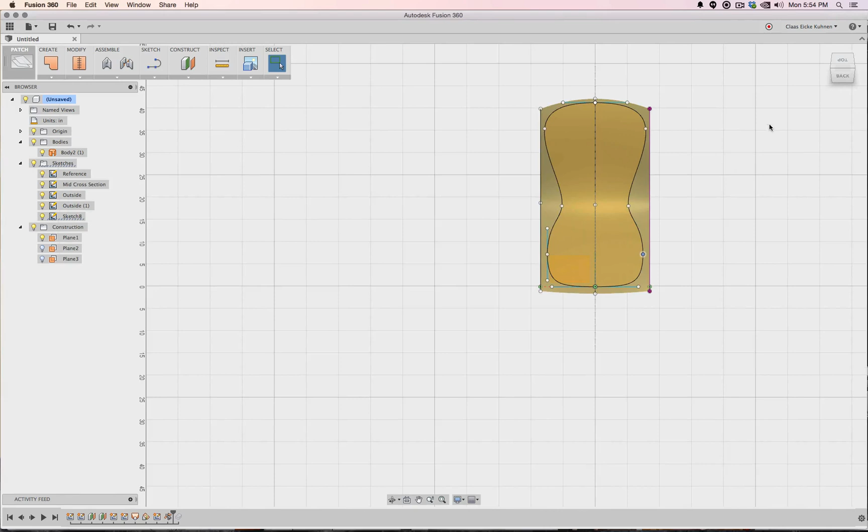So maybe move this one in a little bit there. Let's move this one a tick down. Okay, let's see if maybe simply rearranging something like this is already enough.

There. See, it perfectly cuts through. Oh, there it does. Okay. So sometimes a little bit of adjusting your drawings should do it.

Interestingly, this one decided to skip what we did. See, edit, and simply clicking OK, and everything is updated. Okay.

I hope this one, for example, gave you a good idea of how flexible actually this approach is. Also, some things can go wrong. Well, everything can go wrong at one point. But you also have maybe a little bit more work. But I feel like afterwards, the result is also much more pleasing.

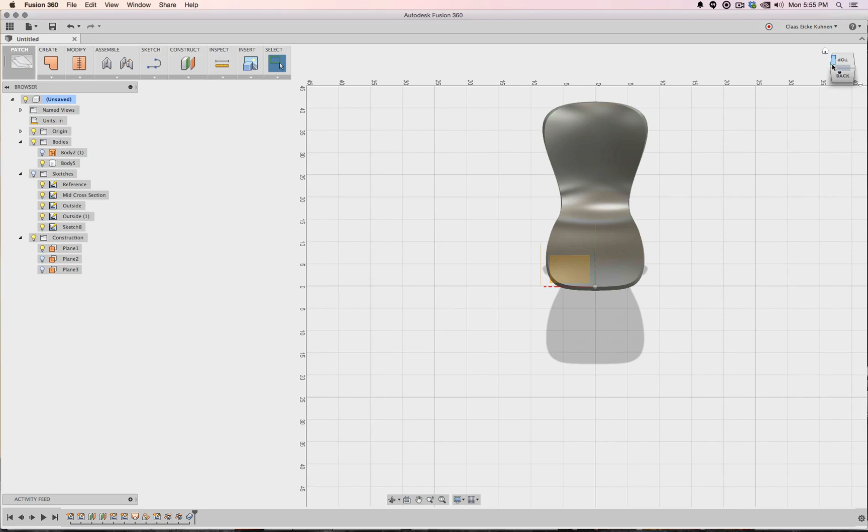Okay, so that was everything in regards to how to create some basic wood shells for using this method. Here's actually now one last way how to make a quick shell. You see I deleted everything. I just have my center spline. Oh no, we don't need it anymore.

And what I'm going to do is create a plane along a path here, and for example, move it to the start. Okay.

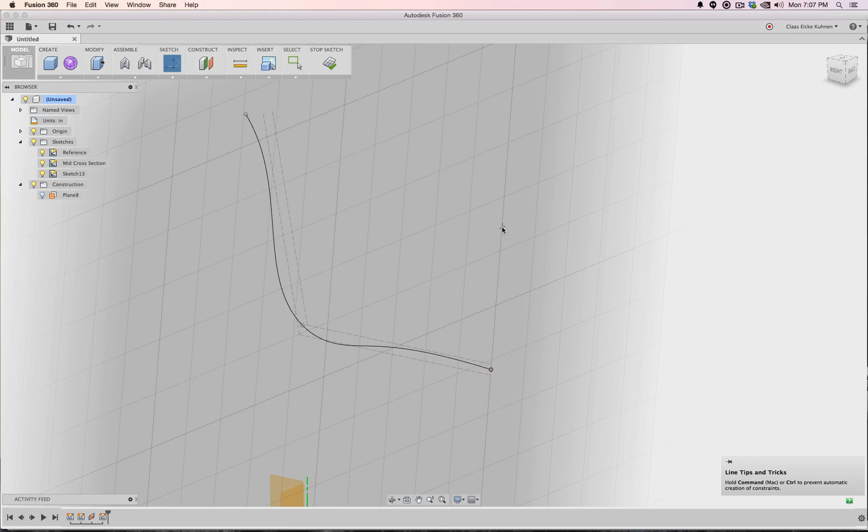Then I create a sketch on this plane. Say include this point so I can snap to it. And for example, from here, drag out, let's say maybe 1 inch, click, and maybe 1 inch up. Okay, click, escape, and then I do this one more time. There to here, 8 inches, click, and 1 inch up, click.

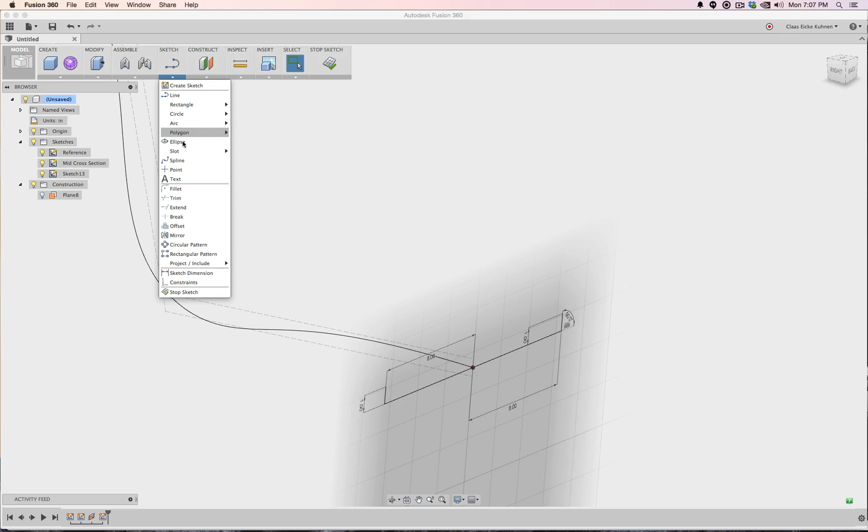Okay, nope, not you. Okay, so why did I do this? Why did I do this? Simply I have 2 high points and a low midpoint. So now I can go to Spline and say click, click, and click.

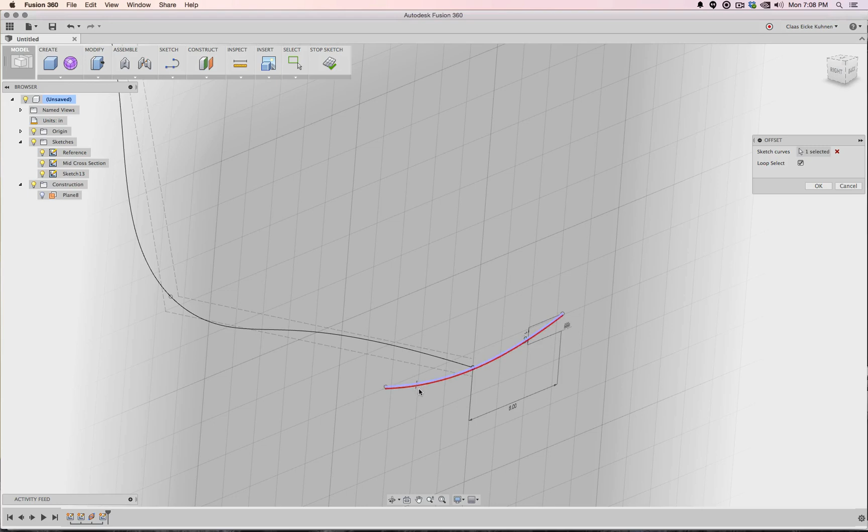Okay. Now those lines here were just helpers, so I can delete them. Zip. And for example, then I could go to offset this one an inch down.

Let's remove those annotations here, some fragments. Okay. And we have to cap these lines.

So let's see. That doesn't look good. So let's see what's going on here. Maybe here to there. Well, okay, I just simply go straight down.

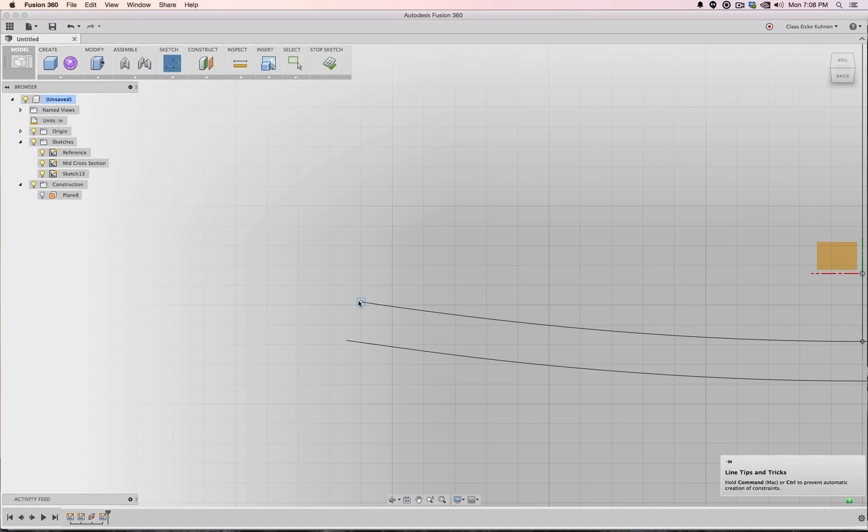Fusion's a little bit cranky here with the correct snapping. Not a big deal. Zip. One down. And if I want to be really precise, I make another line down. So all these lines are the same. And then I simply delete this one.

Now, this line, I'm going to make construction. Spline and say zip, zip, and there. And click on the green button. Okay. Stop sketch.

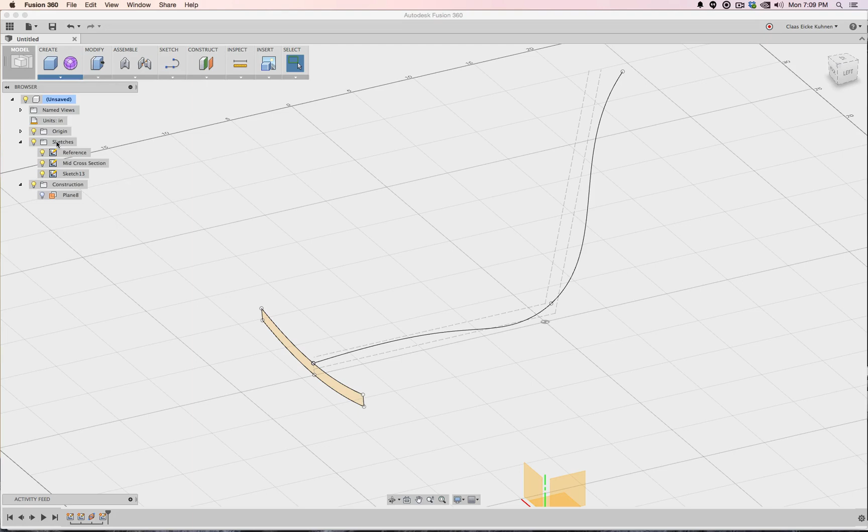And yeah, so now I can take this and run it along the spline. So I go to sweep this profile along this path. There I am. So this is a very easy way to make a symmetrical shell based on, for example, a cross section.

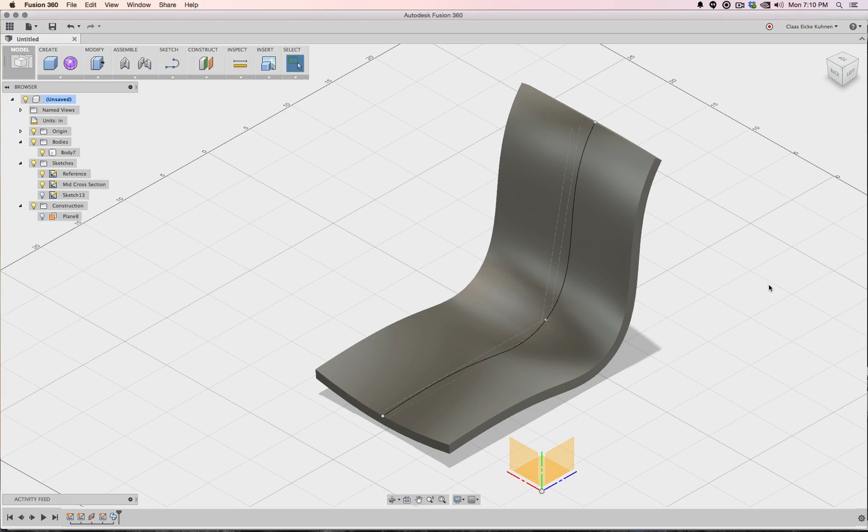And this basically concludes all the different demonstrations we could utilize to create certain types of wood shells. And you see this, for example, is a very simple one. Others were a little bit more complex. So based really on what you need, you can simply use a more simplified approach or a more complex approach, because each one will give you either simplicity and it's easier to manage, or it's more complex, but you have a higher freedom of creativity.